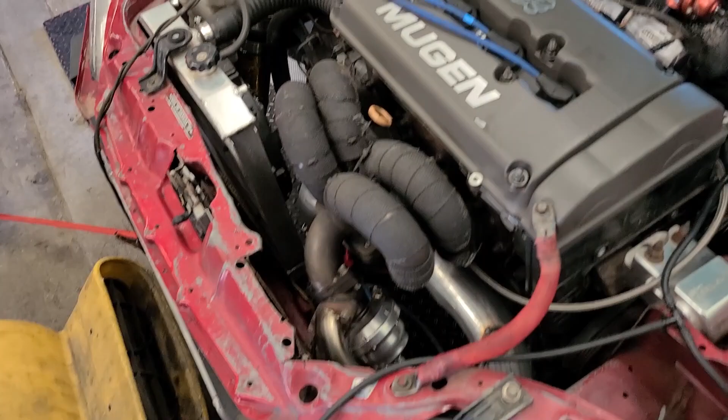We're here today with another EG hatchback. This one has a stock B18C1 with an eBay turbo kit attached. We've already fixed a couple issues: spark plug tubes were full of oil, valve cover grommets weren't sealing, and we had a couple vacuum lines and other things to fix. We went over the boost controller and made sure all that was squared away. I think I've got it ready to start tuning. We're going to roll into it.

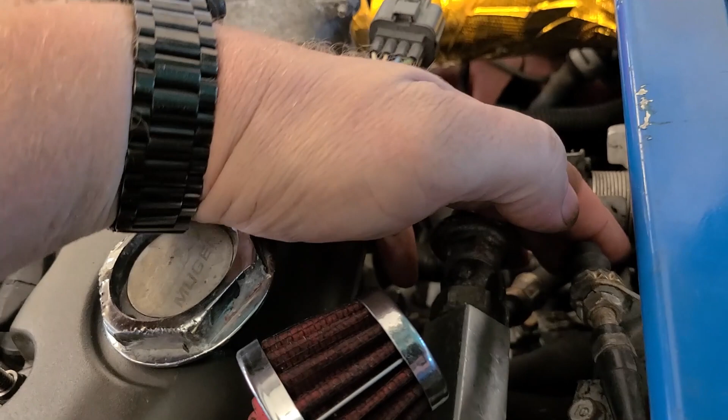My clutch in here is making an awkward noise. I don't know if you can hear that. I'm gonna roll with it, but it kind of concerns me.

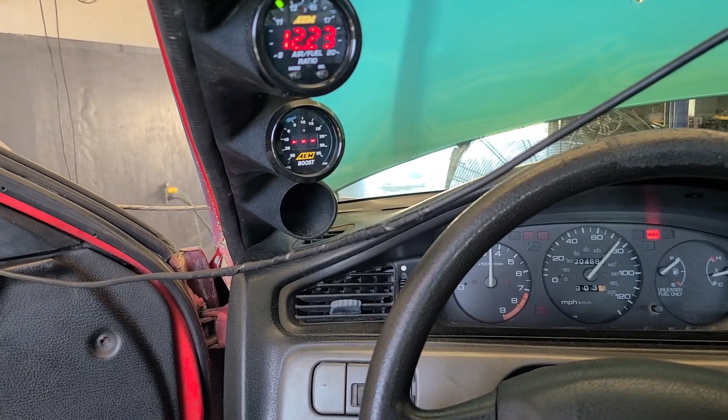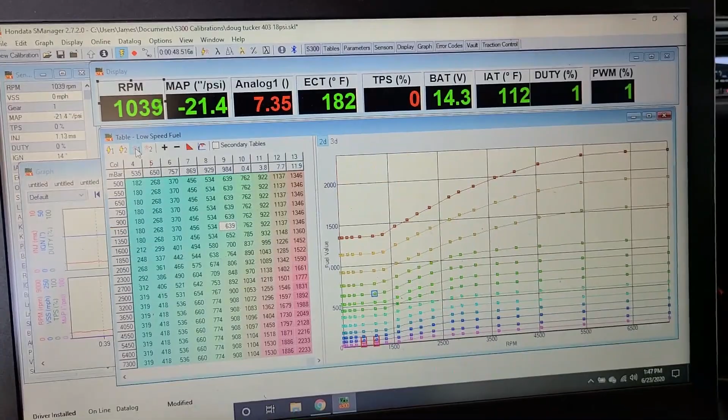Alright guys, this will be our first baseline pull with VTEC turned off, just to get a reference and baseline on what our air fuels are on the low cam.

We were so lean on that one I had to let out. Let me correct that.

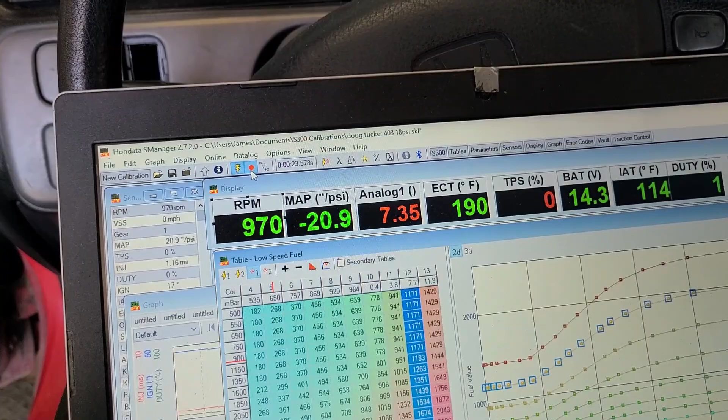Much better off that time. I think we're about ready to turn some VTEC on.

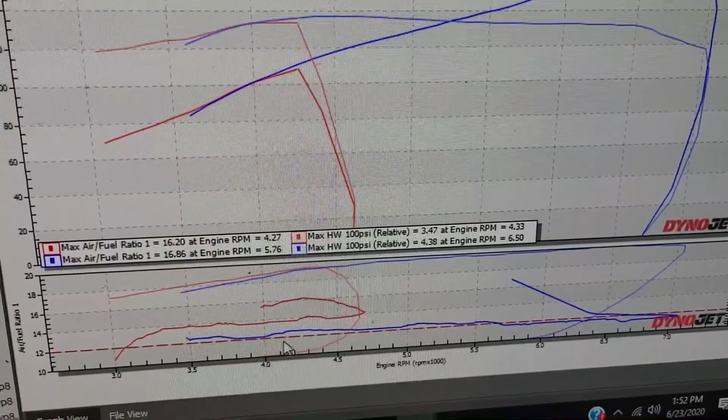Alright, so that was 4.3 pounds. Boost controller is turned off. We got a 3-port MAC valve on this one. Air fuels were pretty close. I'm going to add just a tick more right here around the 4,500 range, and we're going to go ahead and set up the VTEC tables and turn those on, and we'll be back afterwards.

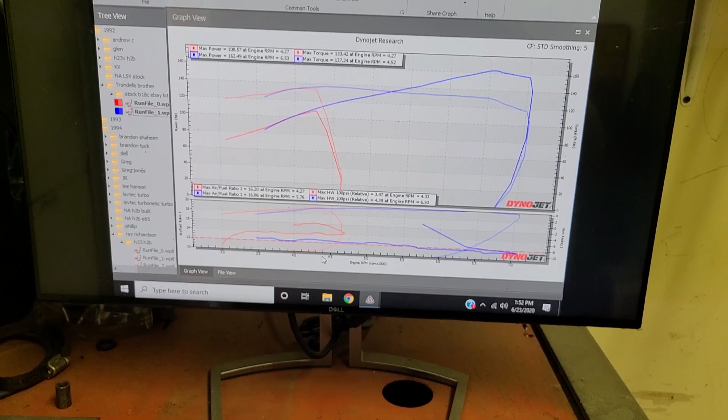Alright, let's try the VTEC. I don't know if we're gonna go too lean, too rich, or what, but we're gonna give it a try.

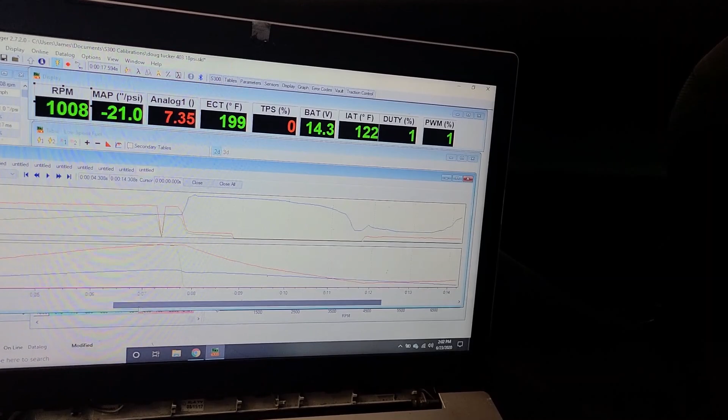Air fuels actually look really good. See what kind of boost we saw. 6 pounds.

Alright, that's on. 5.82 psi. Our air fuels actually look good. That was the blue run prior to this squiggly line.

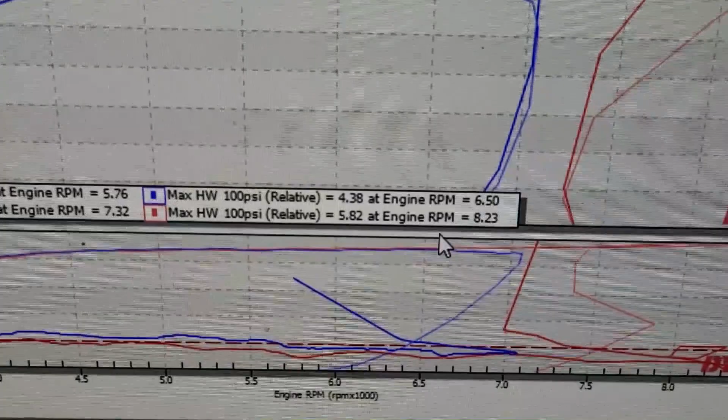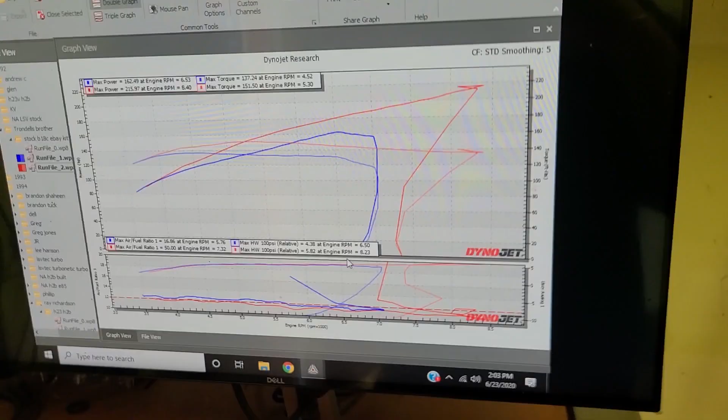Looks like we do got a little bit of boost creep, but boost is so low right now. I'm gonna go ahead and turn that boost controller on for the next pull. Everything seems to be holding up just fine.

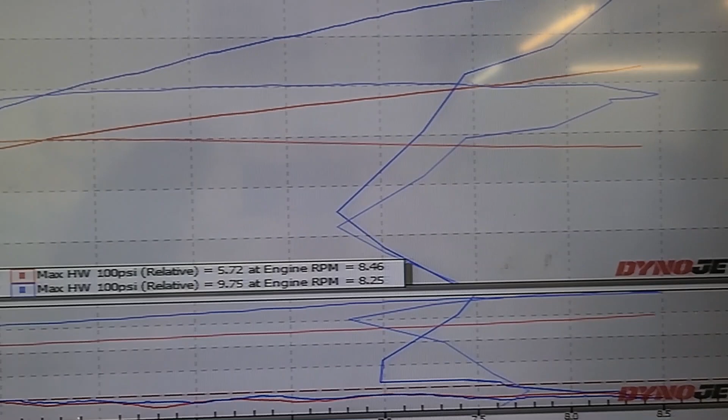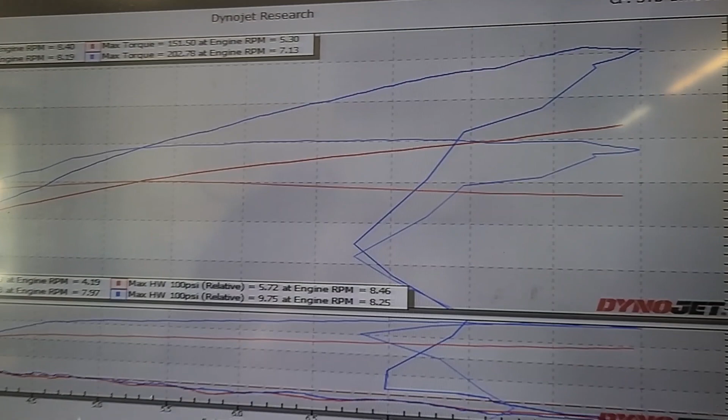Alright guys, that was a 4th gear pull instead of a 3rd, like before. 9 psi, still got some boost creep, gradually making it to the peak horsepower by redline. But made 307 horsepower and 202 foot-pounds of torque. Air fuels were still good, so gonna give it more boost.

Alright guys, that was 332 horsepower, 218 foot-pounds of torque, 11.65 psi. Not much more psi for the amount of duty I gave it through the controller, but we'll keep on moving forward.

Alright guys, I cropped it. That's our base run versus our last run. You can see our boost graph is much more broader.

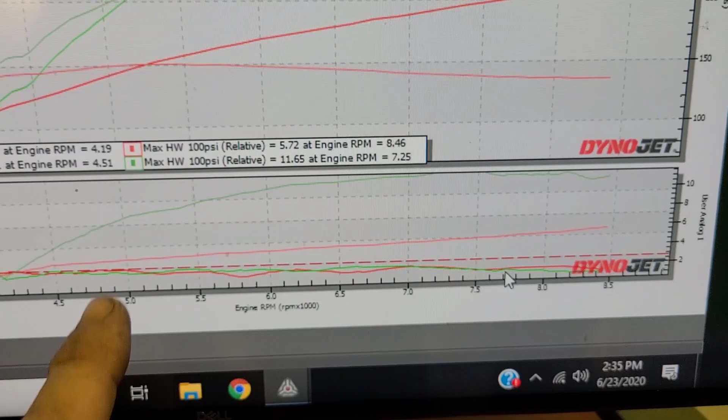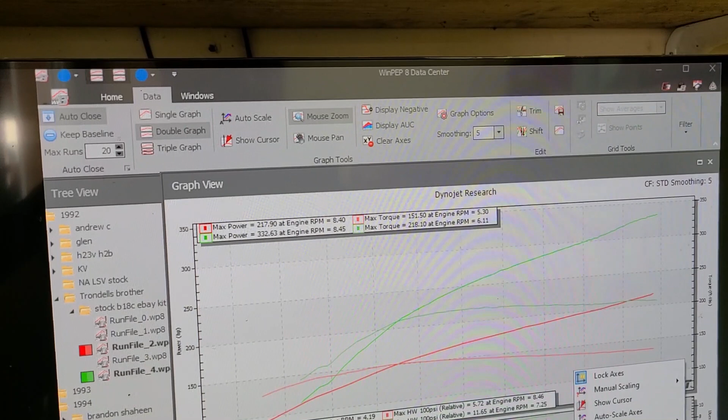We'll see if we can target that 14-15 psi range and see if we can hit the high 300s to 400 horsepower and be done. It's pretty hot today, let's see exactly what it says. Pretty much 100 degrees up in here. We'll be back after I turn boost up.

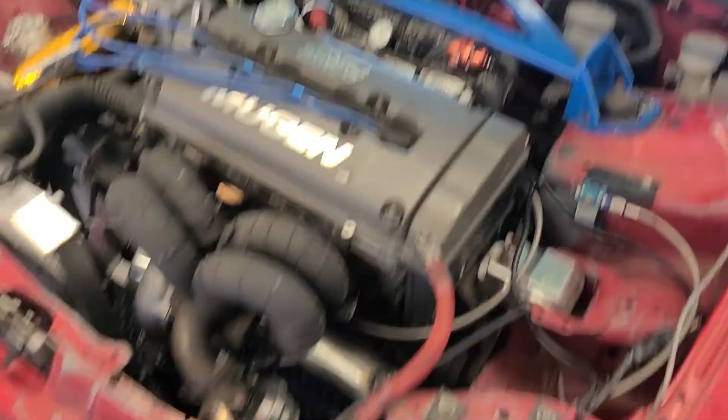But yeah, that was 15 psi, 366 horsepower, 230 foot-pounds of torque. But apparently something wasn't happy.

That was either wheel spin or clutch slip. Let's go to speed, instead of engine RPM on here. So yeah, looking like we had some slippage for sure. I'm gonna tend to those issues and we'll be back.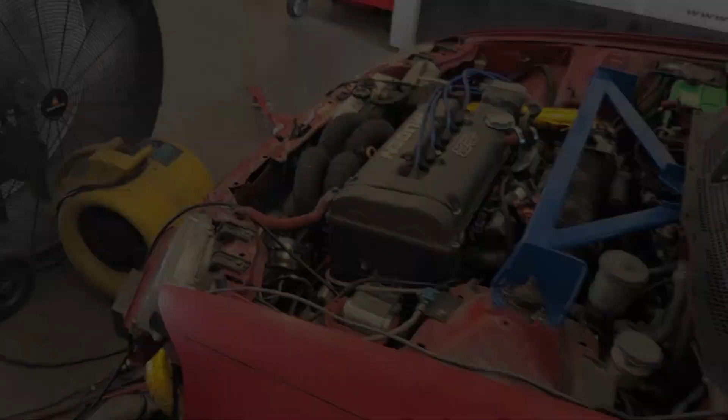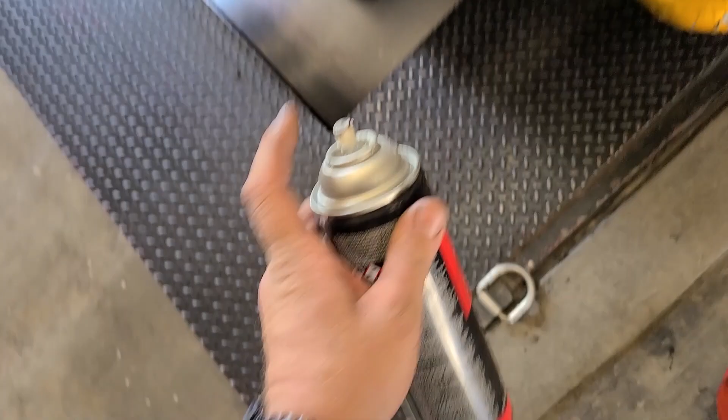Alright guys, I'm sure you watch Boosted Boys, and they always spray something on the tire when they have wheel spin. This is what I use. I'm pretty sure this is similar to what they use. I don't know why it's such a secret, but yeah, spray adhesive. Put it on the tire like so. One application does the whole job. It'll last as long as we're on the dyno.

A motherfucking smoke machine is what this thing is.

Alright, 361, and she goes rich as shit up top. So I guess we're gonna be pulling some fuel.

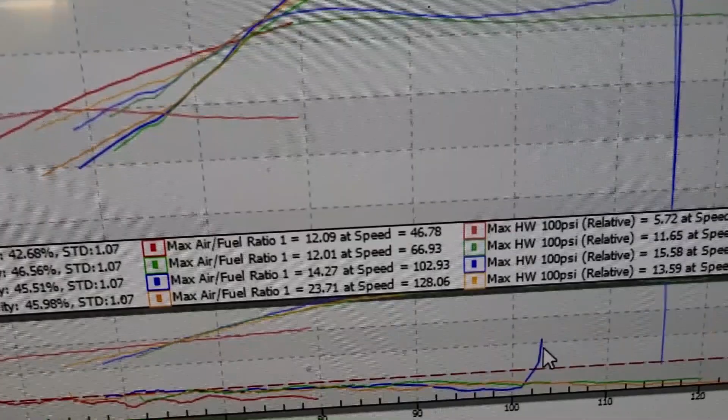Let's see, she had more heat in her that time because I didn't give it a good chance to cool off. Made 13.5 psi, and that did make 361 horsepower and 252 foot-pounds of torque.

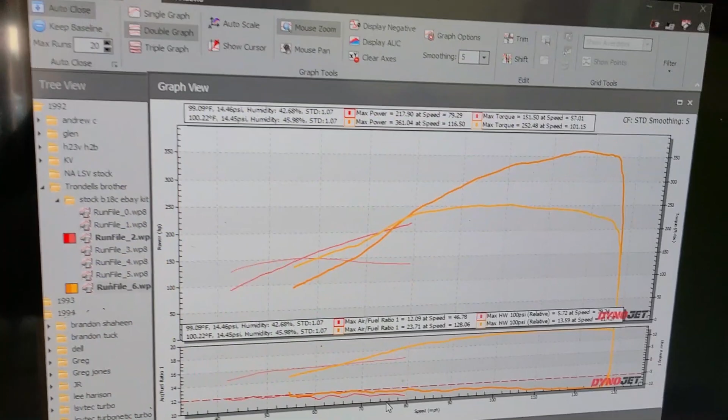Let's clear these other runs. Alright, we're going to try to clean up this area right here, get some fuel out of it, and we'll be back.

Alright, I just found this while the car was cooling off. Trying to look into this idle issue I'm sure y'all have noticed, and I've probably already mentioned, but that nipple goes to the back of the intake manifold. And yeah, I don't know what that ever went to, but there's no way we have been tuning the whole time with this humongous vacuum leak. But I could be wrong.

I'm going to start with plugging that off and cranking her back up and making sure we still got a decent idle. I've noticed my idle's gotten way leaner than it was when I started, a lot choppier. So we'll see what happens.

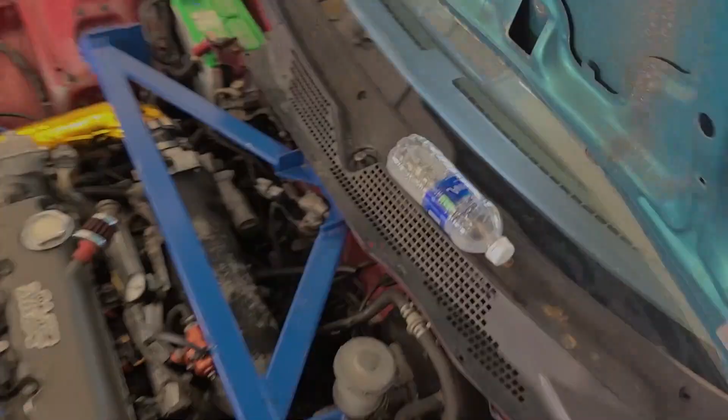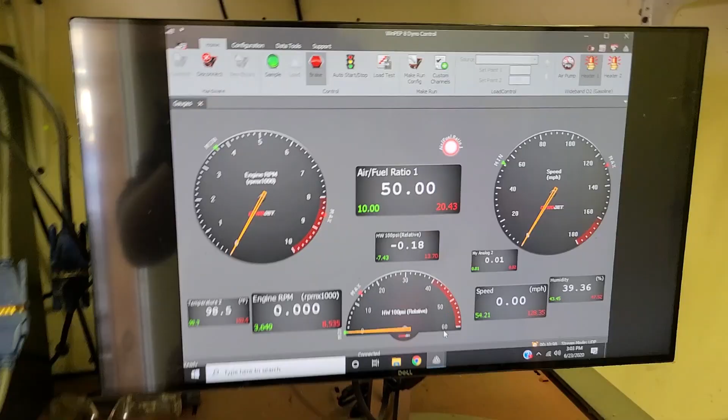Alright, there we go. I got a bolt in it with a hose clamp. I have not changed anything in the tune, I haven't even pulled fuel out. I feel that I should do another pull without that boost leak there, and we try again. I hate to take fuel out and then we need it because of that issue.

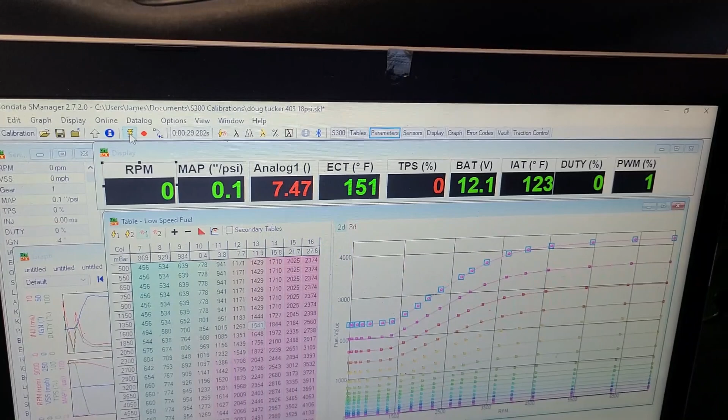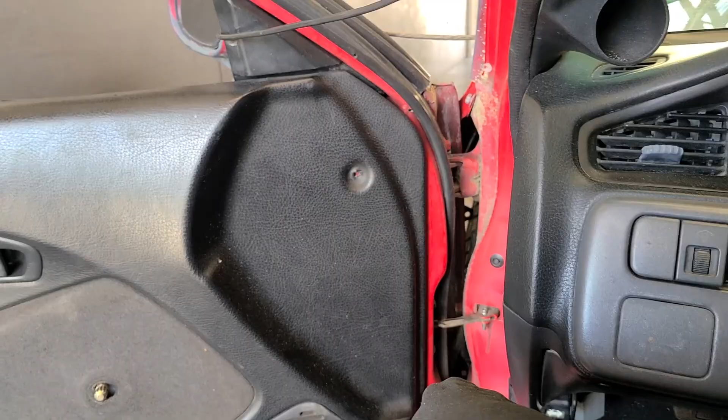Alright, we are back. Intake temps have not cooled off, but the water temp has. And our idle is super low. Let me plug that idle air back in. We'll be back. All right, idle air is plugged back in and turned back on in the software.

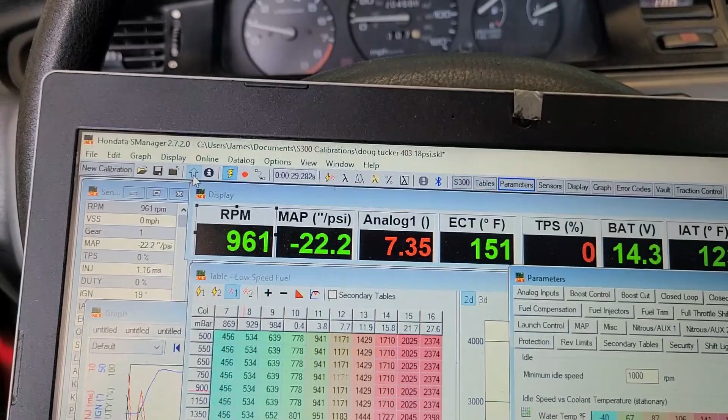I don't think this thing works, to be honest, but let's find out. No, it looks like I'll manually be idling this up. So we've had a leak the whole time because my idle has never been this low. So let me adjust the throttle body plate so the idle's good. I'm just going to simulate what my foot's doing right there. It's going to have to get it to idle manually around 900 to 1000 RPMs, and we'll be back.

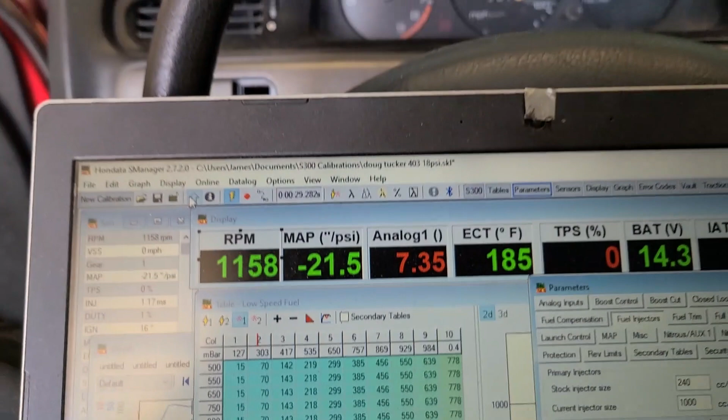Alright guys, we have a normal idle again. Had a couple vacuum leaks I had to fix. Let's attempt the same pull as we left off with. I'm not going to make any changes. Hopefully we don't hit a boost cut.

Filled this shop full of smoke. Woo! Can't breathe.

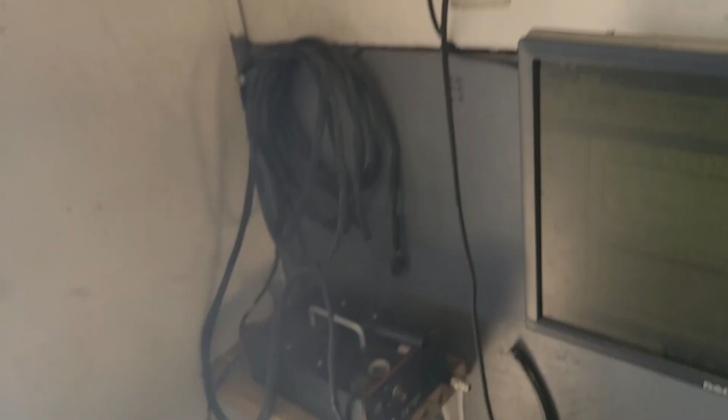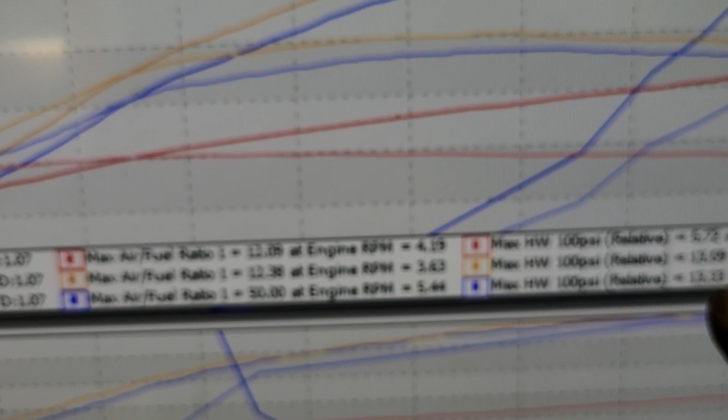Alright, our temperature has gotten warmer. 101 degrees, 41% humidity. That pull was 344 horsepower, 237 foot-pounds of torque, and again that was 13 pounds of boost. So she went real rich, and we didn't make any more boost, so that could be temperature related.

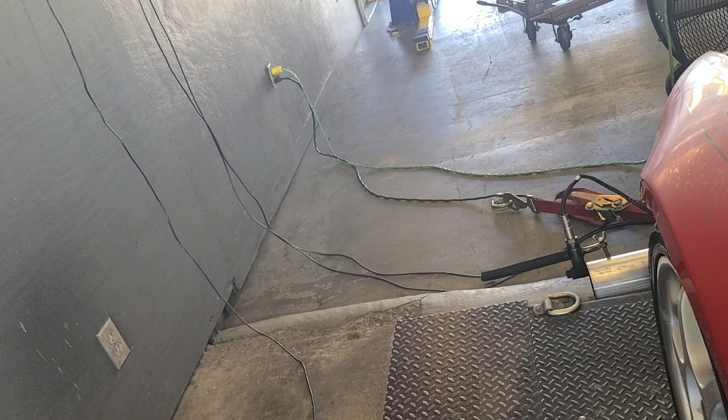One minute it's smoking like a freight train, and the next it's not. My idle's higher than it was a minute ago. I think the turbo is hurt. It is literally burning my eyeballs.

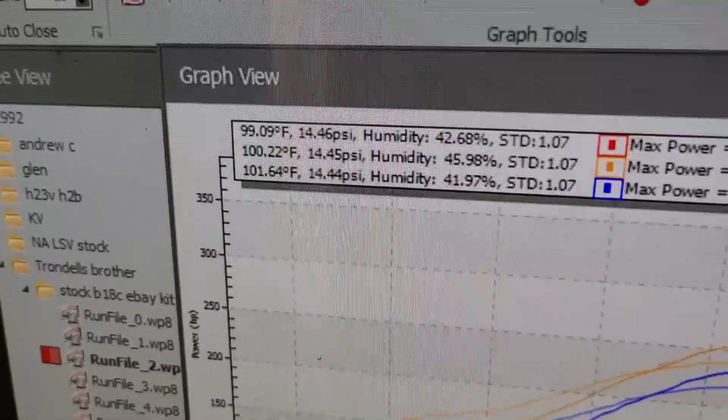Alright guys, that blue run was our last pull. The orange run was the pull before that. I did not make any tune-up changes. The temperature and the humidity changed barely. Lost about 20 horsepower and 20 foot-pounds of torque. And it got richer. And my idle didn't used to sound like this.

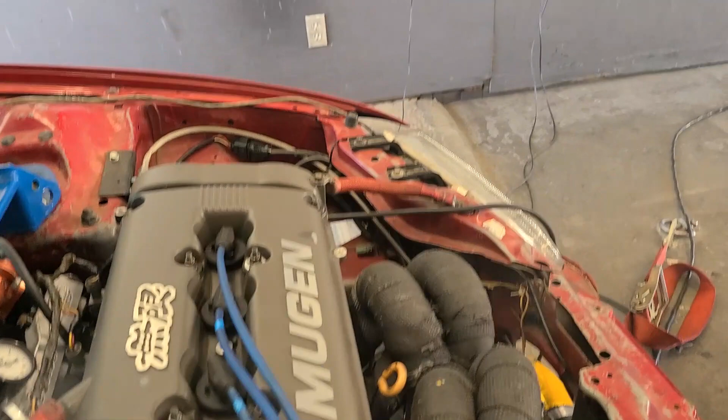And I've always had smoke out of that, but not that bad. I don't know if you guys saw the clip from previously before I had put it on the dyno. It was smoking out the exhaust real bad. Now it's doing that again too. Once again, it had cleared up, now it's come back. I believe it had a hurt piston and we just finished it off.

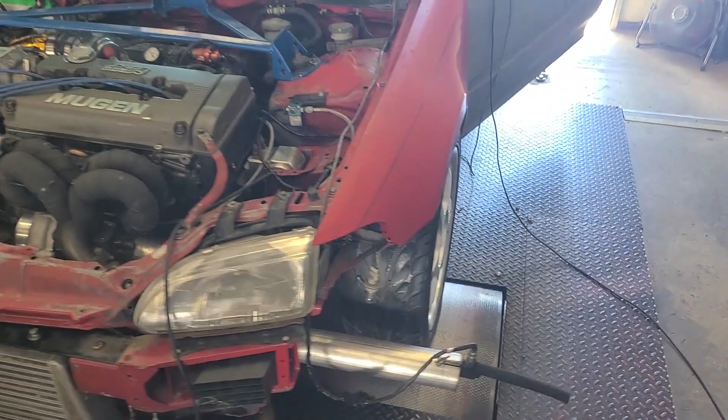I think I'm gonna jump into a leak down test. If it passes those results, then we'll keep moving forward, but I don't think it will.

All right, that's cylinder 1. We're good there. All right, that's next in line, cylinder 3. She's fine.

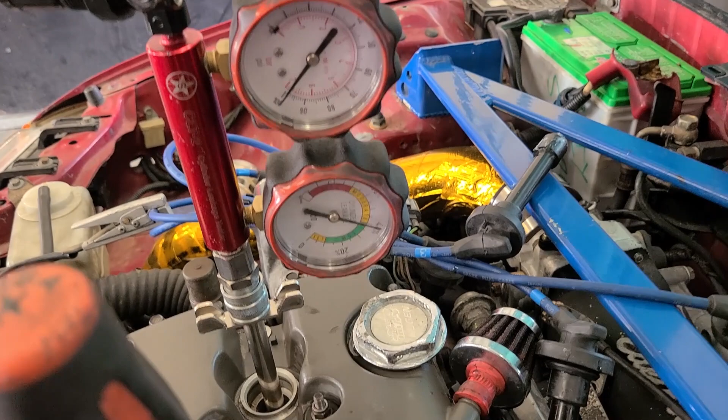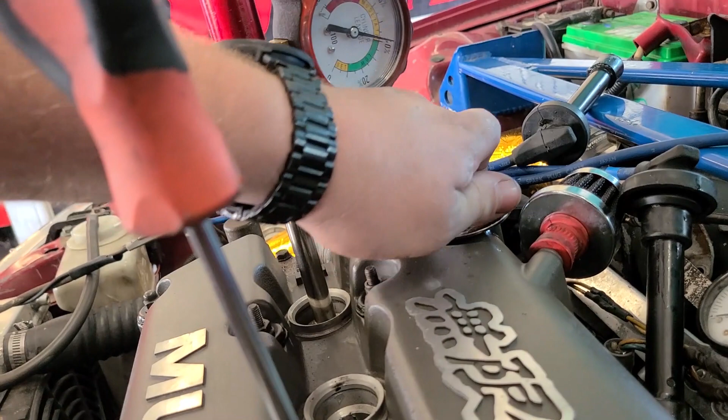All right, guys, that's cylinder 4. As you see, we've pumped 100 psi air pressure into the cylinder, and this gauge is showing us we have 40% leakage. You probably can't hear it on your TV, but there's a hissing coming out of here, and it shuts up when I remove it.

She has a cracked ring one, but we're gonna go one more cylinder just to make sure it's only one cylinder.

We got one more left. Hopefully that one's healthy and is just down one. Set of pistons and rods will fix this thing right up.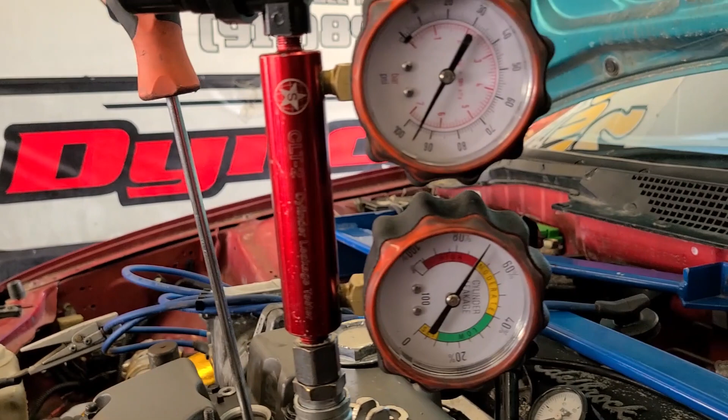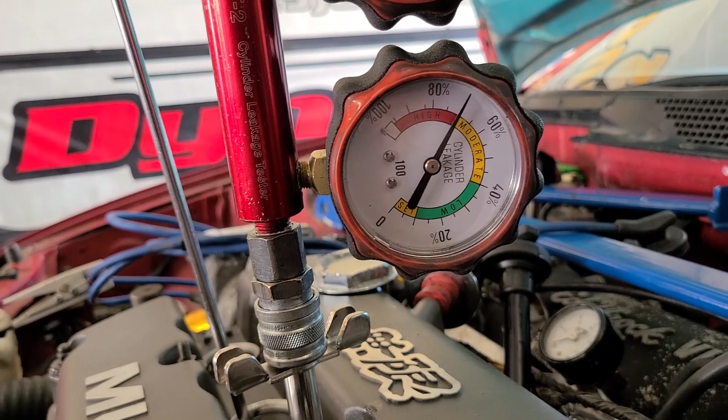Well, air compressor bled down some, but that's all we can get in it. So yeah, but we still got a good right amount of leakage. Over 60%, 70 to be exact. Probably got about 65 with the air we don't got in it. But that's 2 cylinders hurt, cylinder 2 and cylinder 4.

Oh yeah, I can feel it, blowing some hot air out. Yeah. Alright, well, we'll be unstrapping this one.

It's done. Just so you can see it again, this is the boost we started off with, 5 psi. This is where we ended up, 13. Our air fuels, none of the runs were lean. Every one of them goes rich.

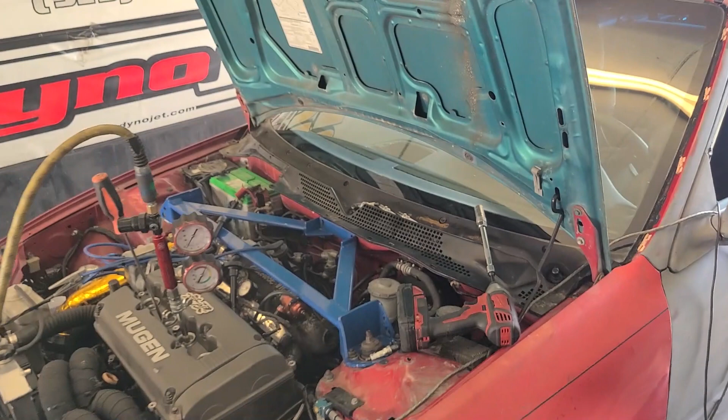I hadn't got far enough to start pulling fuel out. I was gonna get the boost and things where we needed it, or close to where we wanted it, and then dial it all in. But sometimes you just don't make it that far. This is one of those.

This is it for today, guys. I'm gonna unstrap this thing, clean up, and move on to the next job. It's hot as shit. Later, guys.